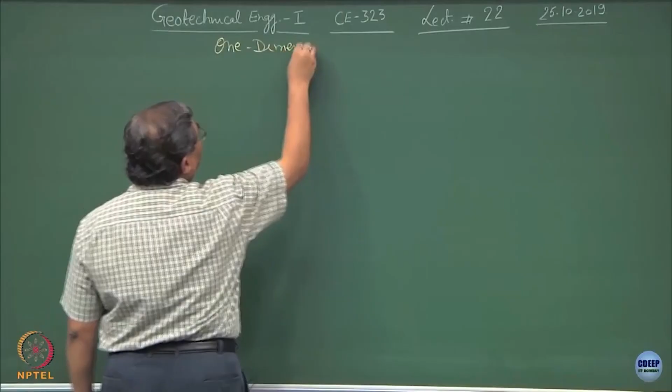Let us try to derive the one dimensional consolidation equation. If I have the soil mass, and if I take an element of the soil mass of depth dz located at a depth of z up to the CG,

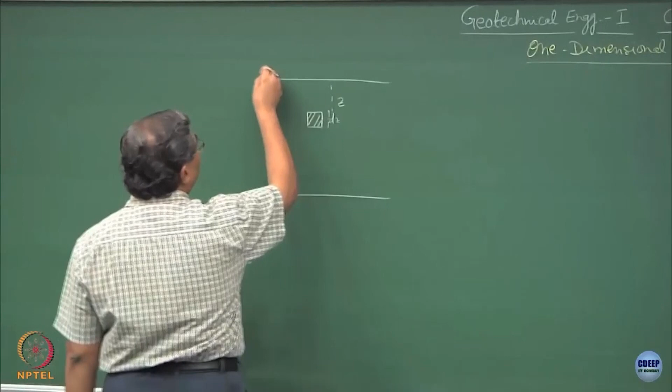as you remember, what we did is we exposed this soil mass to external loading, maintaining two boundaries which are freely draining. So this is boundary number 2 and number 1, and there is an external load applied on the system, which is causing delta sigma to occur at this point at the middle of this element.

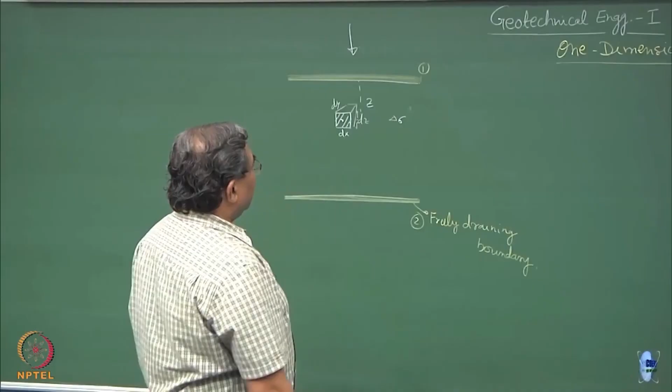So if this is dx and the third dimension if I consider to be dy, because of the loading the pore water pressures are going to develop, and because of the development of pore water pressure and due to the vicinity of the draining boundary, there will be a tendency of the soil mass to dissipate the pore water pressures.

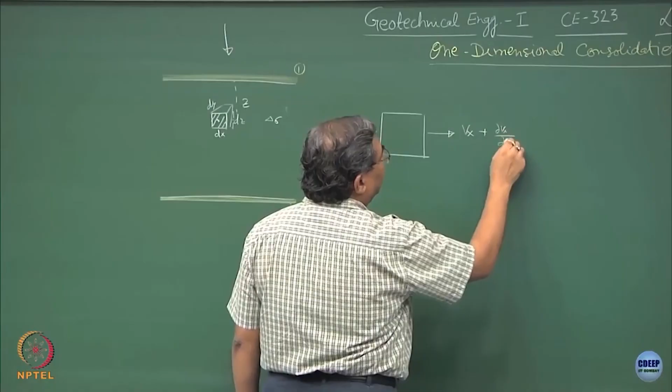So suppose I assume that in this element there is an influx of seepage or discharge, and this is Vx plus del Vx upon del x into dx. This is the continuity of flow entering the system. In this direction I can say this is del Vz upon del z into dz. So I have to reverse the directions of the arrows - this is Vz, and this is the discharge which comes out.

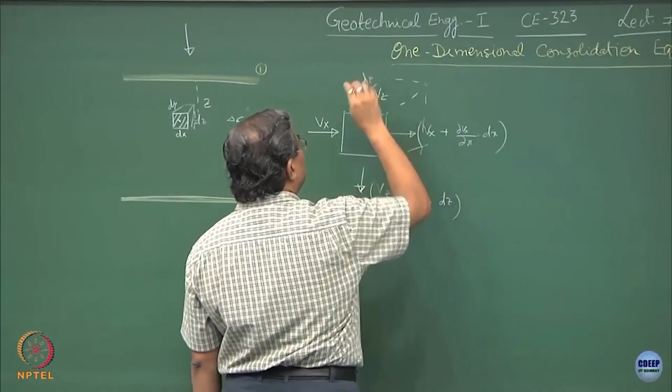I can consider this element as a 3-dimensional element the way I showed earlier, and this axis is dy. I can write dV by dt is the change of volume. Let me put this as capital V - this is the volume of the element of the soil.

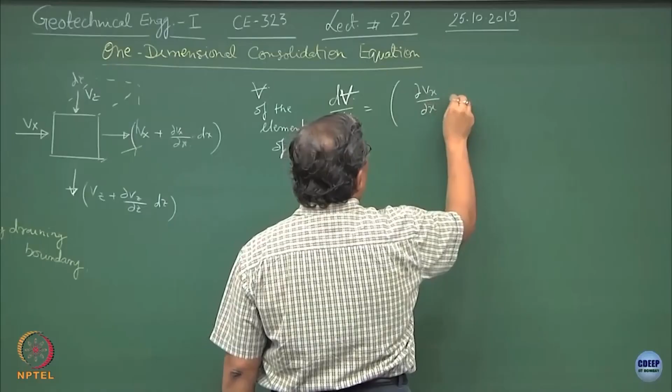I can prove that this dV by dt equals velocity into the area. That means del Vx upon del x into dx multiplied by dy dz, plus del v by del y into dy into dx into dz, plus del v by del z into dz into dx into dy.

I can simplify this as del Vx upon del x plus del Vy over del y plus del Vz over del z, all multiplied by dx into dy into dz.

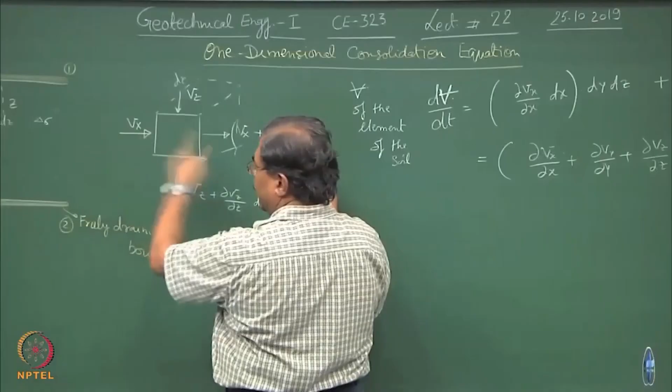I hope you realize that I have already subtracted the discharge coming out of the element from the discharge entering into the element. So this is the mass balance. Otherwise this would be Vx plus this term multiplied by dy dz, minus this term.

Now if I consider that the soil element is incompressible, under that condition what happens? This will be 0. But most of the time soils are compressible as we discussed, so del V by del T is not equal to 0.

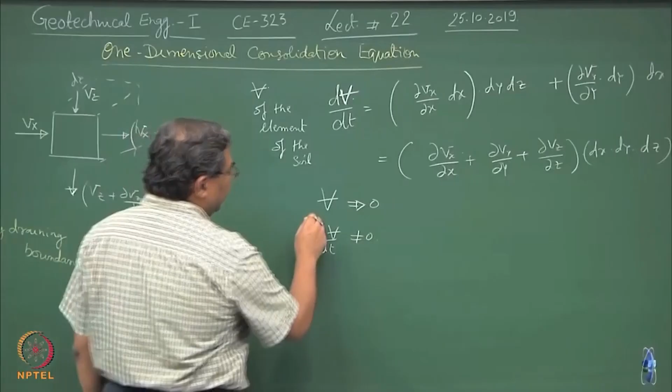Now the question is, if I assume one dimensional consolidation occurring in the system, can I obtain a relationship showing the rate of change of volume with respect to time? This is where we can take help of the relationship we developed: delta H upon H equal to delta E upon 1 plus E naught equal to - this was our basic premise. Is this okay?

Now, analysis of this leads me to a situation where delta H is equal to mv into delta sigma prime into H. You agree? This we derived in the last lecture.

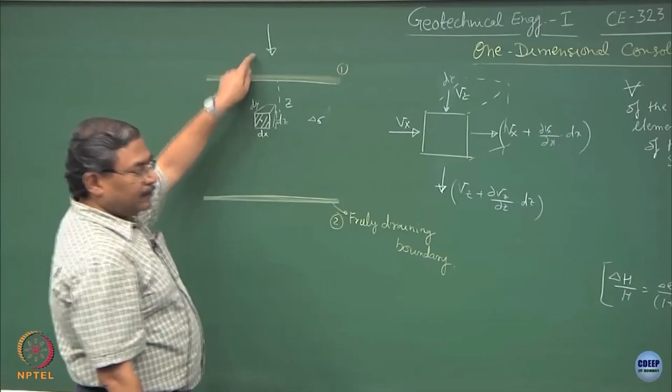What is delta sigma prime? Delta sigma prime is the effective stress developing at the CG of this element which we have considered, because of the external loading. So this delta sigma prime is equal to delta sigma minus delta u, and this delta u is nothing but delta uw.

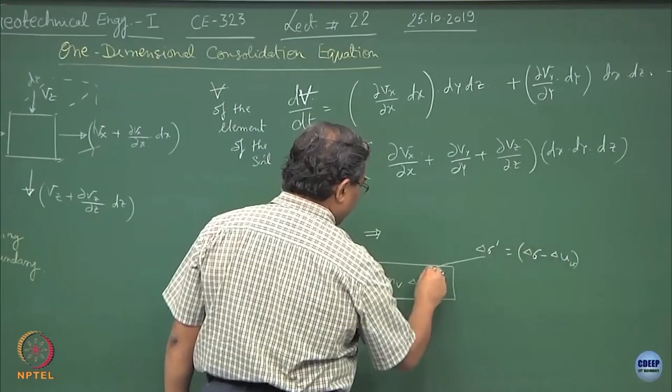Fine. Now if I try to write del v by del t, differentiating this function by substituting it, mv is practically constant we are assuming, multiplied by delta sigma which is constant. What is changing is delta u. I will remove the subscript w now, it is understood that this is water pressure. So this is del of u multiplied by H, which is constant. So what I have done is I have got a relationship between the coefficient of volume compressibility, the pore water pressure developing in the system, and its rate of change multiplied by thickness of the sample.

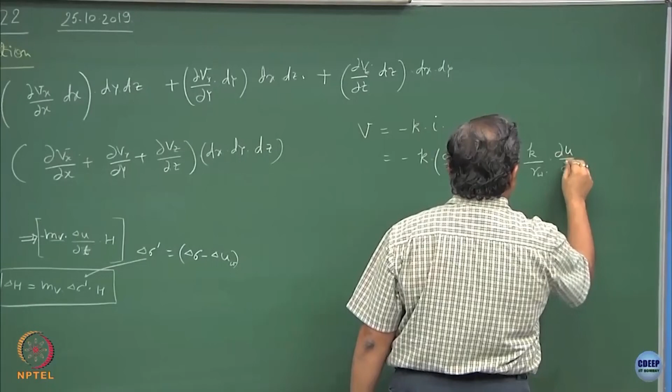Now, is there a way to get rid of the velocity vectors? Velocity is nothing but minus k into i. So I can write this as minus k into del h upon del x, where h is the head, and this can be written as minus k over gamma w into del u by del x. Because h into gamma w is equal to u, the pore pressure. So this is the relationship I am using.

If I substitute it over here, assuming a one dimensional situation, the other terms will disappear. This is the volume term of the element. I can write that minus k upon gamma w into del u by del x, into volume. And we are taking the derivative of this function, so it has to be differentiated with respect to x. This will be equal to minus mv del u by del t into h. So this is your rate of change of volume with respect to time that we have obtained.

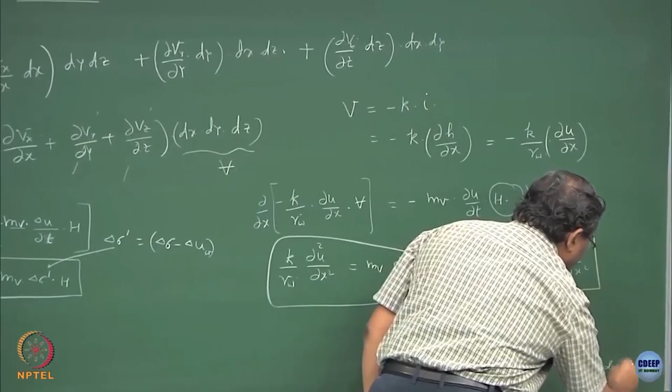This term which is appearing over here is also defined as Cv, where Cv happens to be the coefficient of consolidation. Now this is what is known as the one dimensional consolidation equation, which was proposed by Terzaghi.

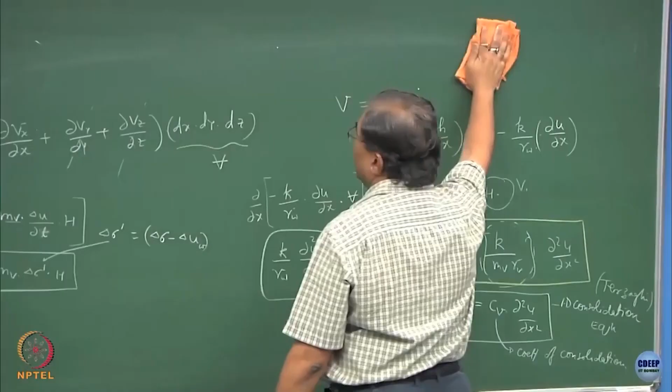Now we need to understand what we should be doing with this equation. Number one, what is the form of this equation? Suppose if I say del square u by del x square multiplied by Cv equal to del u by del t.

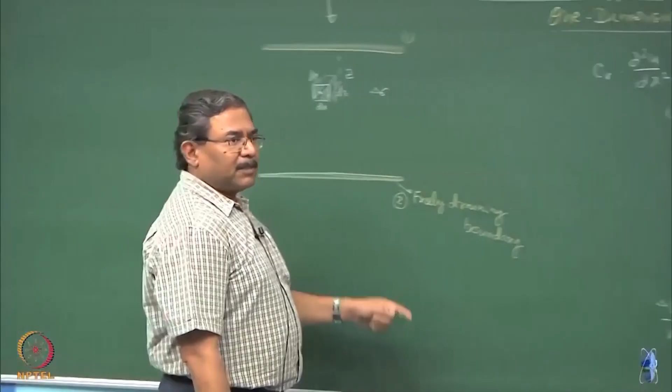Truly speaking, if I solve this expression or this equation, I hope you understand what is Fick's second law, you must have come across it somewhere. So this is u, the pore water pressure. I can substitute it with concentration, or temperature, or whatever you want, and then this is your second order Fick's equation. So truly speaking, u is a function of x and t.

X happens to be incidentally the z. So to make it more apt to our discussion, I will say this is u as a function of z comma t. In simple words, the one dimensional consolidation equation gives the value of pore water pressure at a given time and at a given depth in the soil mass. So that means if I consider a given point at a given time, because of the external loading, whatever pore water pressure is developing in the system is depicted by the one dimensional consolidation equation.

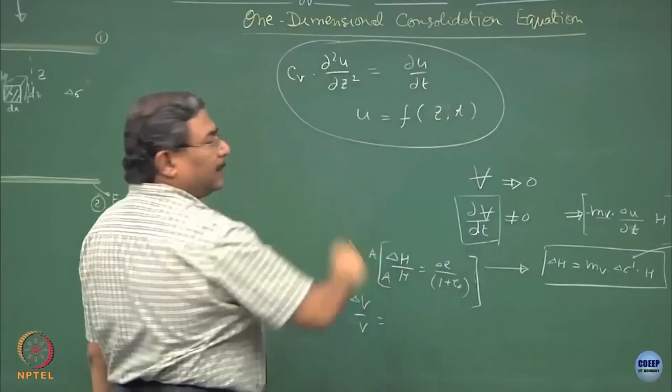So what we have to do is we have to solve this differential equation to get u. So this is the first objective. When we solve u as a function of z and t, I have to apply some boundary conditions.

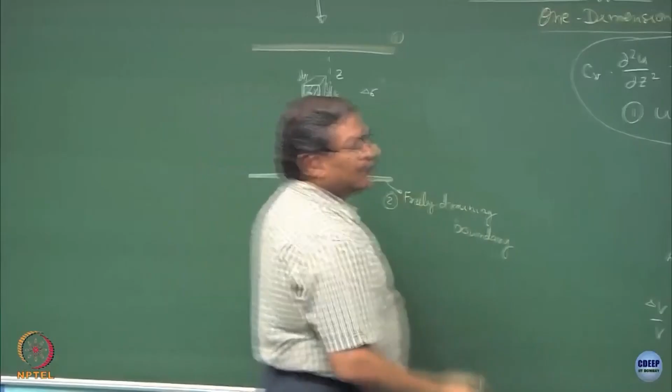What will be the boundary conditions? The moment I apply load, because of the hydraulic conductivity, and this is saturated soil, the assumption is the moment you apply load, delta sigma gets generated, and this delta sigma is at t equal to 0, initial condition. So, delta sigma is generating delta u.

Now, if my initial value of u is 0, delta u is nothing but u. So, this becomes u initial, and if I say minus of this, so basically delta u is nothing but the ui term. Initial pore water pressure is 0, clear? This is the first equation which I am having.

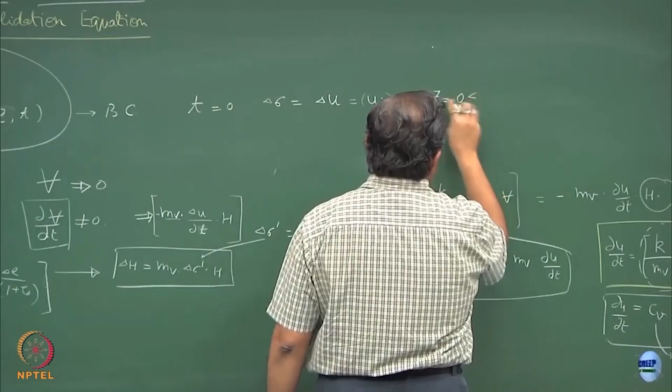Now, this is existing at z equal to 0 at this boundary as well as at this boundary, because both the boundaries are draining. So, this is t equal to 0, delta sigma equal to this, and delta u equal to ui in the entire domain. So, this will be less than equal to 2d.

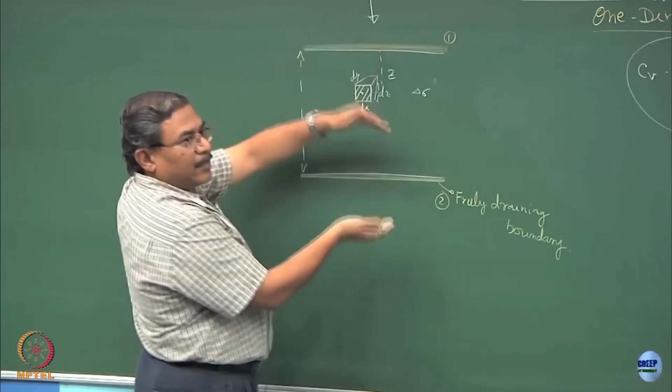The physical significance of this is the moment you compress the whole system by applying external loading, the initial pore water pressure develops, which is equal to the delta sigma value, and at t equal to 0, the entire system shows a constant pore water pressure. Alright, this is the initial condition.

So, that means if I want to plot, let us say this is z, and suppose if I plot pore water pressures. In the initial condition, what is going to happen is the value of pore water pressure developing here as well as here is going to be a constant. I hope you agree with this. So, this is what is equal to ui. The moment you applied the pressure, the pore water pressure is equal to ui at t equal to 0.

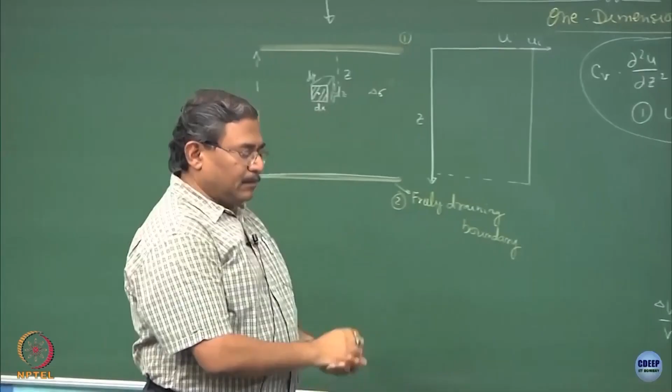Now, what is going to happen? Something intermediate is going to happen at t equal to t, let us say, very difficult to estimate. Or if I want to estimate what is the value of pore water pressure at this time, what I will have to do is I will have to solve this expression. So, this is what f(z,t) would be.

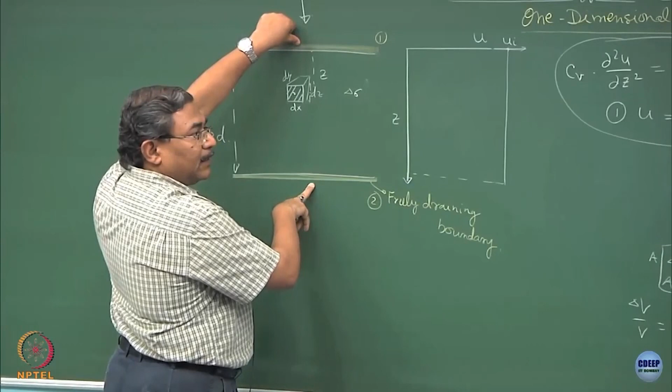Intermediate state. The third state is when I say t is tending to infinity. So, the moment you say t tending to infinity, what is going to happen? Because these two are drainage boundaries, the pore water pressures at this point in the soil mass and at this point in the soil mass is definitely going to be 0, and the pore water pressure is going to be completely 0, because t is infinity. That means the other bound of the plotting would be u equal to 0, which is t tending to infinity.

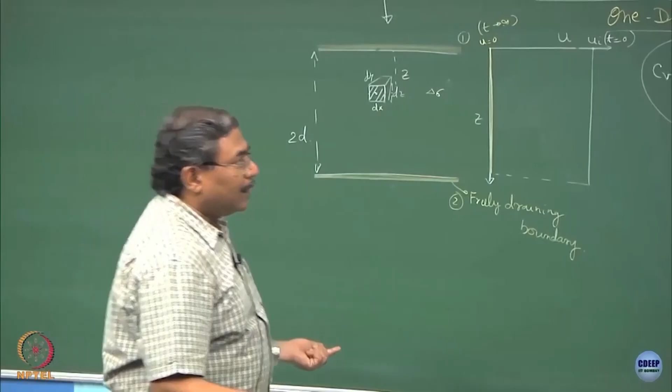And this is the case when you have t equal to 0, initial case. Is this part clear? In between, what is going to happen? Let us try to discuss. What is the form of this equation? What type of equation is this?

It is a parabolic function, alright. So, that means in between whatever is going to happen is a parabolic distribution of u as a function of z and t. So, suppose if I consider the line of symmetry of the sample, this line of symmetry also defines the symmetry of the drainage boundaries. So, whatever I am doing right now is valid only for the drainage boundaries 1 and 2 put together. If I change the boundary conditions of drainage, this solution is going to change.

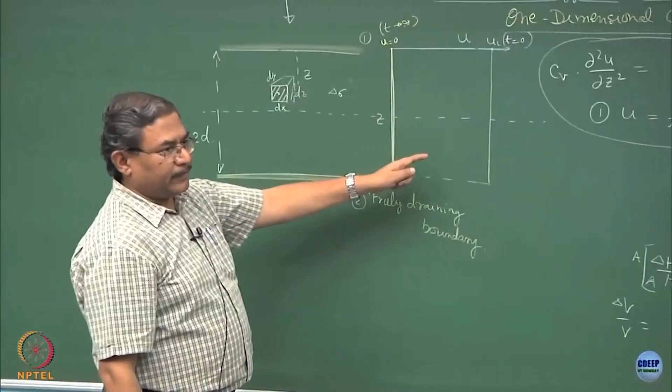Now, it so happens that the moment t increases from 0 to some finite value, this is how it is going to look like. Is this okay? Now, this line is known as an isochrone. What we have done is, we have just represented u as a function of depth for a given time.

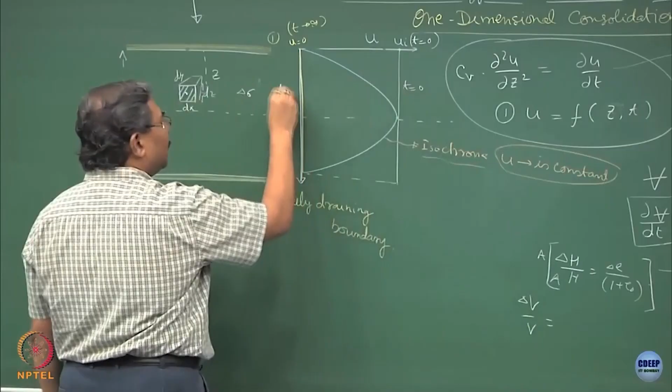So, this boundary, please remember, corresponds to t equal to 0, and this boundary corresponds to t tending to infinity. Alright. So, these are isochrones. As time progresses, what will happen? The isochrones will keep on shifting towards the left hand side. So, in this direction the time is increasing.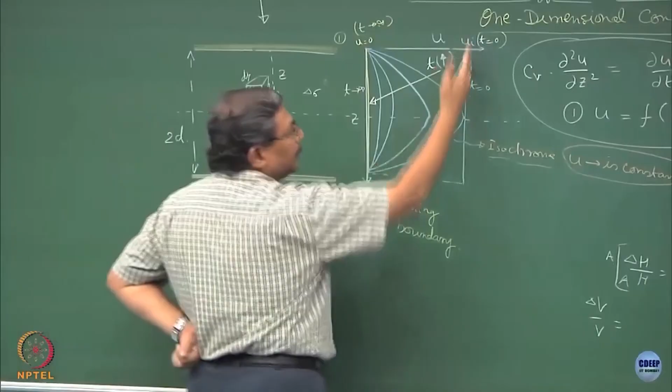And a stage comes when the pore water pressure becomes zero at t equal to infinity. This is the line which you are meeting, this is the initial value. So, what is the interpretation of these isochrones?

If I consider a point over here on this graph or on this curve, can you tell me what this point is going to correspond to? This point is nothing but this equation. Where is the z? This is the z, and where is the time? This isochrone corresponds to a certain time. So, at this point the pore water pressure is this value.

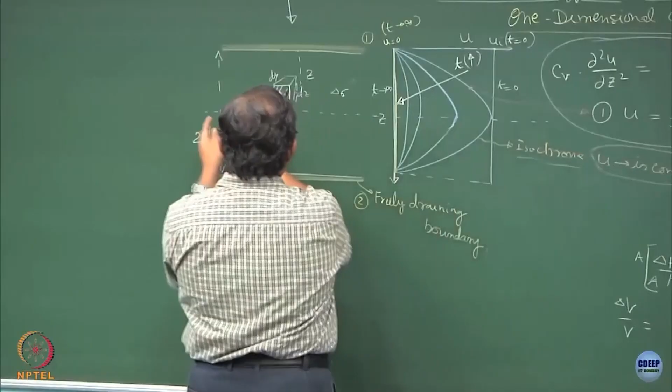There is a symmetry of the isochrones along the axis of the sample, provided the boundary conditions are same, both sides draining. Now, if I draw a tangent over here, what is this going to give me? And if I draw a tangent over here, what am I going to get?

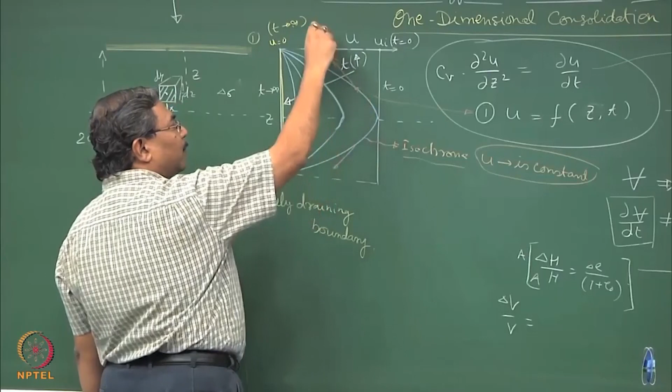Del u by del z at a given t. What is del u by del z? Velocity vector. So, this is the velocity of the water which is present in the pores at this point, and what is the direction? It is moving up, this is moving down, because there is a free draining condition here, and a free draining condition over here.

At this point, what is happening? If I draw a tangent, this is a velocity vector and this is a velocity vector. So, this is the interpretation of the isochrones.

There is one more thing we would like to discuss about the isochrones and how they can be utilized in day to day practice of geotechnical engineering. I hope you are realizing that isochrones are nothing but a graphical form of solution of this equation, and ultimately as t tends to infinity starting from t equals 0, isochrones are also going to tell you how the consolidation process is occurring.

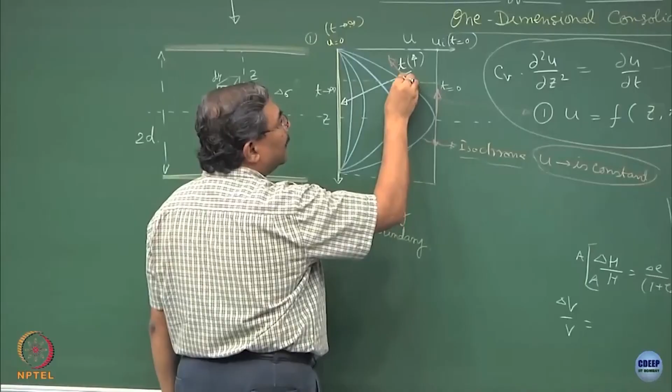That means, if I draw a lateral horizontal line, suppose here, now this is the value of, out of so much of the pore pressure, look at this, x axis is ui, alright. Suppose this is the value of u. Now what is remaining is ui minus u.

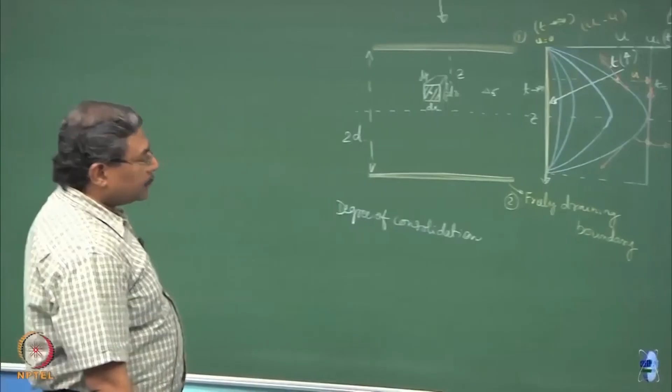That means, if I want to define a term degree of consolidation, it is defined, normally capital U, and this is equal to the total amount of pore pressure which is available to get dissipated to the one which is remaining. So, I will be defining this as ui minus u over ui. This can also be written as 1 minus u upon ui.

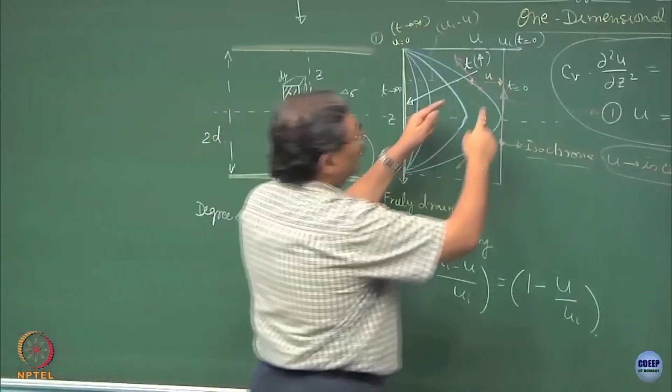Imagine that I wanted to find out what settlement a soil mass undergoes because of external loading, given known properties like K, MV, initial void ratios, gamma D, moisture contents, and saturation equal to 1 since we have saturated the sample. All these properties are known. What I have to do is get the values of pore pressure as a function of Z and T.

Is there any other way to do this rather than going for all this mathematical analysis, experimentally? Yes, there is a way. Ultimately, what I am measuring is pore pressures, which we have measured until now in several cases. So, what I have to do is insert several piezometric tubes all along, and whatever amount of pore pressure comes over here, I can use this for drawing these contours.

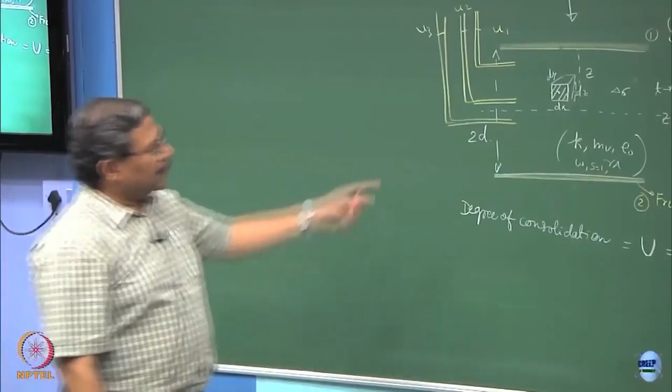It is very difficult to conduct this type of experiment because the size of the piezometric tubes is quite big, and the size of the sample, if you remember, is hardly 25 mm in the laboratory. But suppose you want to see what is happening in the field, you can insert these types of piezometers or capillary tubes, and obtain the pore pressure developing because of external loading. So, you are free to do whatever you want to do.

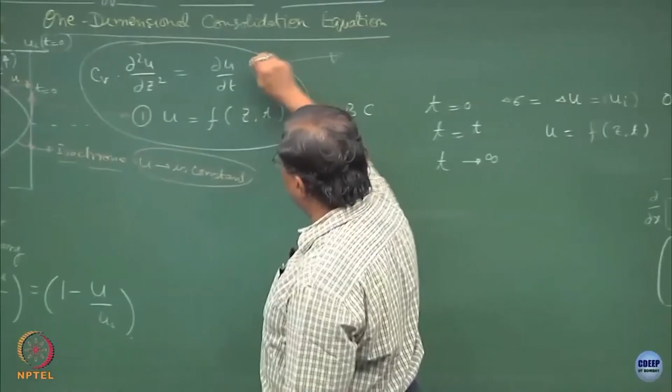The most interesting thing we have got from this simple analysis is, first of all, the equation and its nature. The solution of this equation is going to give me the pore pressure, and using this pore pressure I can find out the degree of consolidation. Now, degree of consolidation is going to tell me how much settlement of the system has occurred.

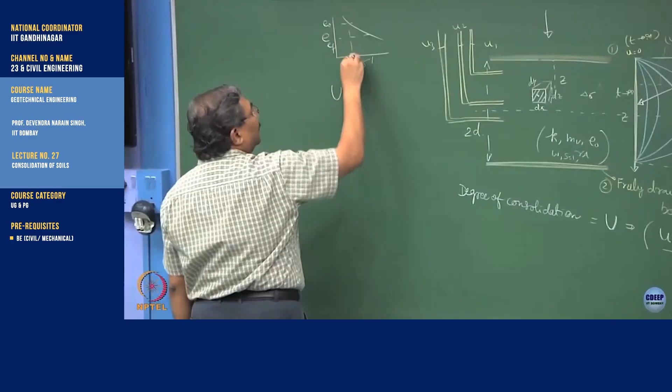That means degree of consolidation can also be defined as, suppose if I extend this analysis to the E-sigma prime curve, starting from E naught I attain E f, and corresponding to E naught the sigma is sigma naught prime and this is sigma f prime.

So this is a situation where I can say E_f minus E_naught, this will be in the denominator, and something intermediate which I can define as E_T will be coming over here.

So this is another equation which I can use for defining the degree of consolidation. Is this okay? That means the void ratio at a given time minus initial void ratio, upon E_F minus E_naught.

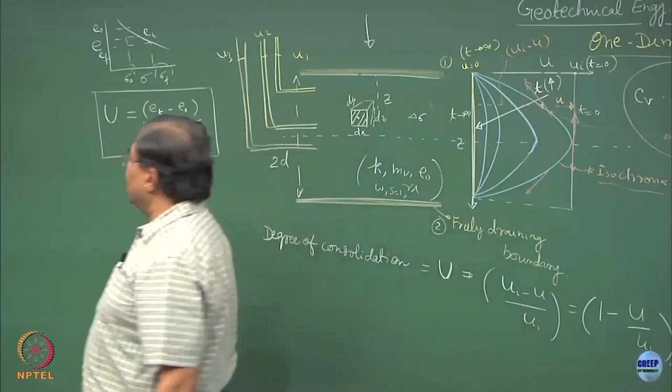I hope you understand E_F is going to be lesser than E_naught, E_T is going to be lesser than E_naught. So negative negative will cancel out and this will become E_naught minus E_T upon E_naught minus E_F. So there are several ways of doing this.

Now let us complicate this function a bit, because in real life these type of boundary conditions are rare. What we have discussed until now is the laboratory setup, where if you remember we had taken a consolidometer ring, we call it an oedometer ring, we kept the specimen there, we put two porous stones there, saturated the entire thing, applied the external load. So this equation is specifically simulating what you did in the laboratory.

If the sample in the water bath can be maintained at elevated temperature, if I do the whole exercise by increasing the temperature of the sample, now we have a coupled effect. This is what people are doing in the Western world. This is THMC of everything.

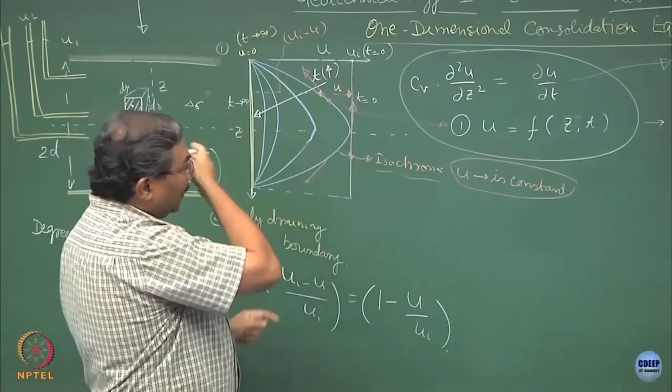That means this whole test has been done under STP, standard temperature pressure conditions. I can raise the temperature of the sample to a certain value and see what is going to happen to the consolidation, how the pore pressures are going to change. So those of you who might get a chance to work in thermoactive structures would still be analyzing the whole thing, only now it would become a function of temperature also.

And that becomes a coupled phenomena which is complicated. So at undergraduate level you are not supposed to learn all these things. A bit more analysis of this fact which we were discussing.

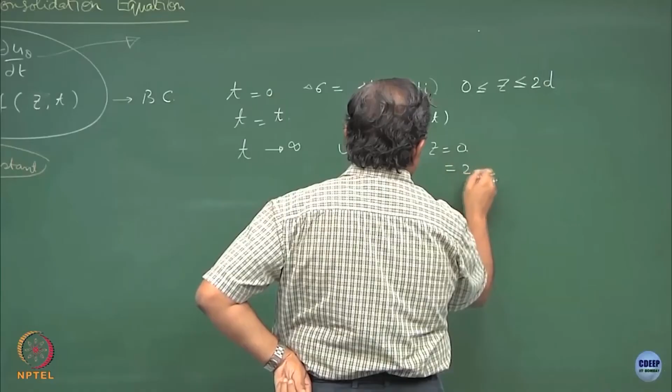So at t tending to infinity, what is going to happen? The value of u tends to 0, and this is going to happen only for z equal to 0 and z equal to 2d, because in between we are not sure about what is happening. So we have to do it either analytically or experimentally.

Now suppose if I say here we have a well defined distribution of the pore pressures. Now if I say that u is a function of z, I do not know what type of variation of the pore pressures is.

So I can also write this as 1 minus, if I say u(z), and from 0 to 2d it is varying in a certain fashion, I can average this out and integrate it from 0 to 2d into dz. The u_i remains the same. If I integrate u_i also in the same form, what is going to happen? This 1 upon 2d will get removed and this function will also get changed to 2d into u_i into dz.

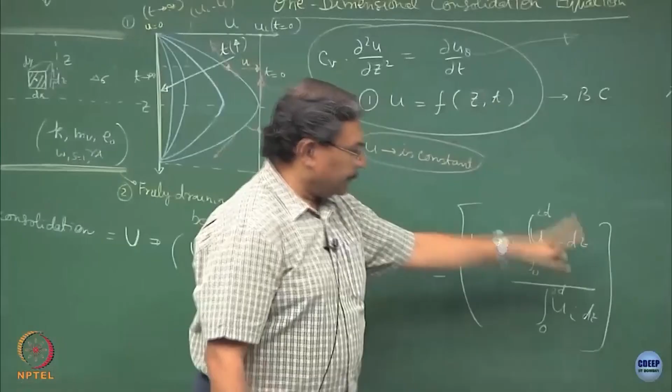That means, if I say that the initial pore pressure is also a function of z, this type of manipulation can be done. The triviality comes...

Suppose if I give you a situation where the clay sample is draining only from one side, this is the impervious strata, alright, and this side is draining. In nature, how is it going to happen and when is it going to happen?

Suppose there is a clay layer, a clay seam which is sandwiched in sands. So this is sand and this is sand, both sides draining condition, what we have discussed over here. The porous stone simulates both side draining.

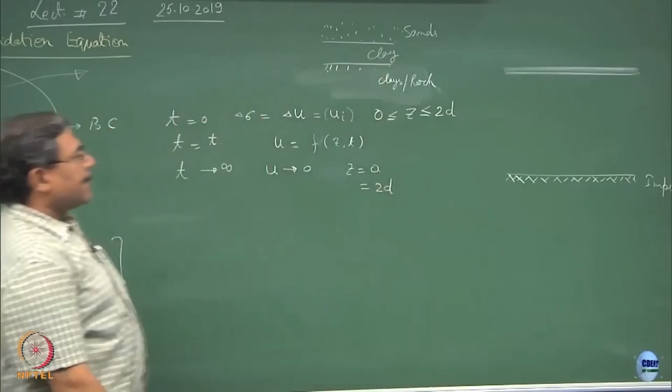I change the context of the problem. The clay layer is underlain by, let us say, another clayey layer or a rock, and hence this is going to be impervious. Now if this is the situation, this becomes one side draining. So when I intentionally used this 2D term, this 2D is defined as the drainage path.

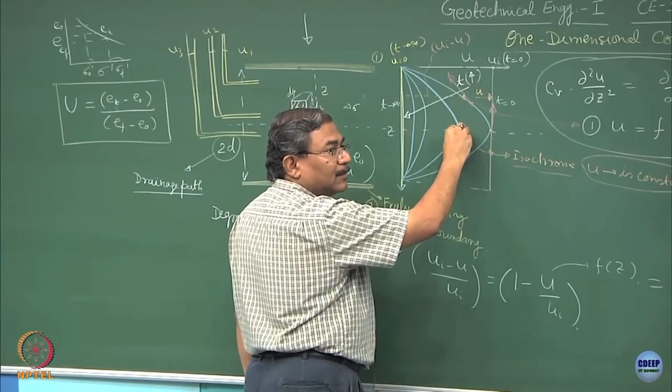So, the drainage path is going to be half of the 2D value. Why? Because there is a line of symmetry, and we have already proved that all these points are going to drain. This point remains confused whether it should get drained here or whether it should get drained over there.

In other words, how many of you have baked a cake at home? If you really want to learn the consolidation process, go and make a cake, and you will realize that despite good heating in the microwave oven, the central portion of the cake remains uncooked. Why?

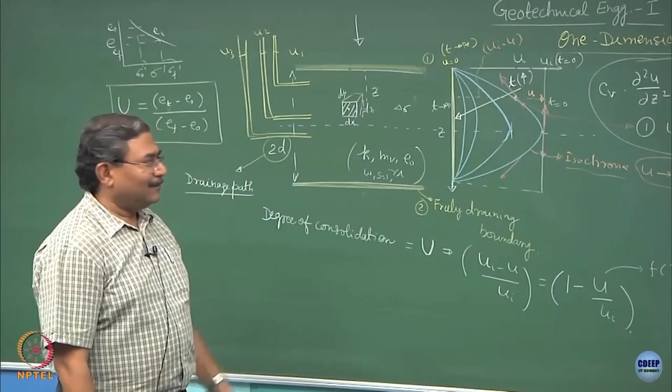This is the answer. Look at the water molecule. It does not know whether it should go on this side or come on this side. So that means the central layers always remain wet. There is no draining taking place, so it is very difficult to consolidate the sample fully.

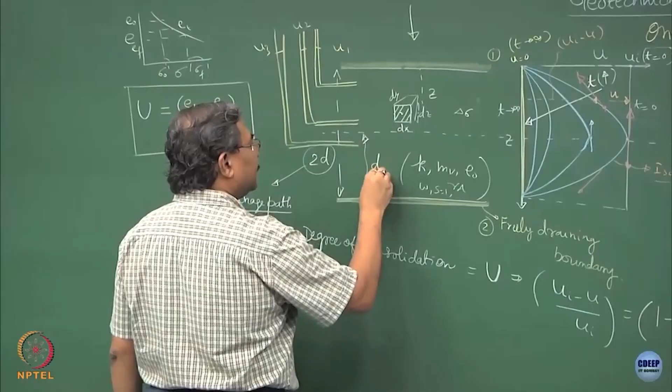So, the drainage path is defined as half of the 2D, let us say D. This is 2 times the drainage path, and D becomes the drainage path through which the drainage is taking place. In this case, the drainage path is going to be equal to H, because this is one side draining only.

Now, suppose I ask you to plot the variation of U with respect to time, what is going to happen? Start from the basics. At t equal to 0, the entire load comes on the system, the pore water pressure develops. This is the value of Ui, which is equal to delta sigma, the external load. As time passes by, what is going to happen?

The top layer will quickly dissipate the pore water pressure, but this being an impervious surface, this is not going to dissipate anything, and hence you have created a sort of profile of pore water pressure like this. Is this okay? I will say that this is the profile, u as a function of z and t.

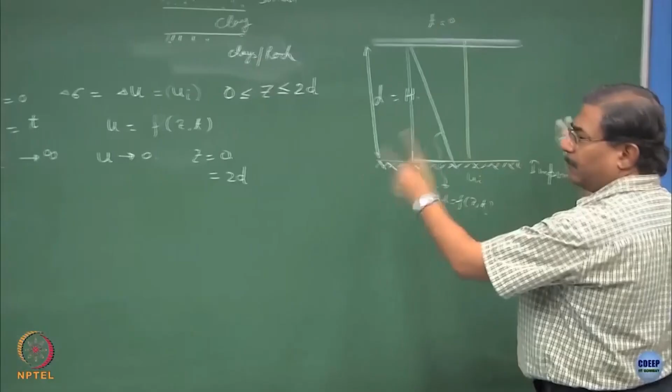This case is known as a partial drainage case or half drainage case, and as I said, this is possible when the clays are sitting over an impervious system, or a clay system which is much more impervious than the clay in which you are trying to find out the settlements.

Now, one more thing which is still bothering us is CV is unknown. You agree? This is a bigger culprit. So, we do not know how to obtain CV because there is some coefficient.

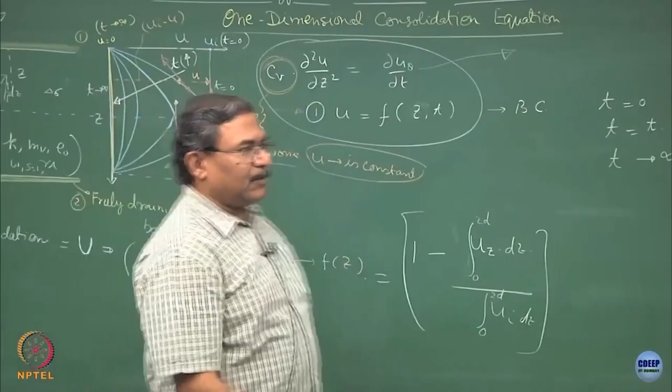Now, you can always say that if I conduct a one dimensional consolidation test and use this expression I had written for CV, so CV equal to K over mv into gamma w. If I know the hydraulic conductivity of the soil, if I know its mv value which I can obtain by conducting the one dimensional consolidation test, gamma w is known, CV can be obtained.

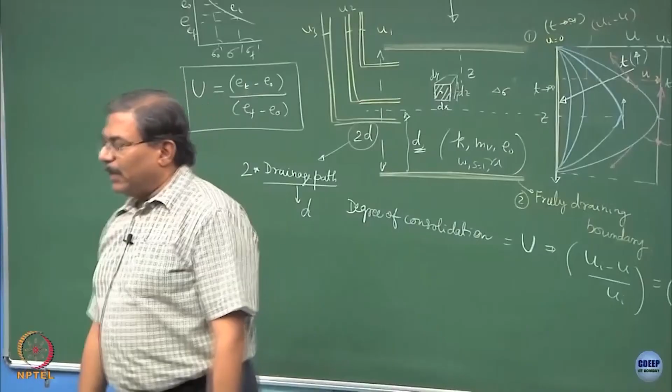Simple method, but normally this is not done. We never obtain CV like this. What we do is we obtain CV, we know MV, we know gamma W, we compute K. So, K is equal to CV into MV into gamma W. Hydraulic conductivity can be obtained by knowing MV value, CV value and gamma W. So, we deferred the problem, it is not solved yet, we still do not know CV. Clear.

One interesting thing you must have noticed, if I ask you what is the dimension of CV, so this is del square u by del z square equals del u by del t, u is truly speaking a pore water pressure parameter. So, the units of CV will be L square by T, and hence this is known as a diffusion coefficient.

Those of you who might get a chance to do higher research in THMC, THMCB and other series of contemporary geomechanics, you can replace this term by different types of coefficients. If I replace U by C, concentration gradient in the direction of Z, concentration gradient with respect to time, change of concentration, diffusion coefficient D, clear.

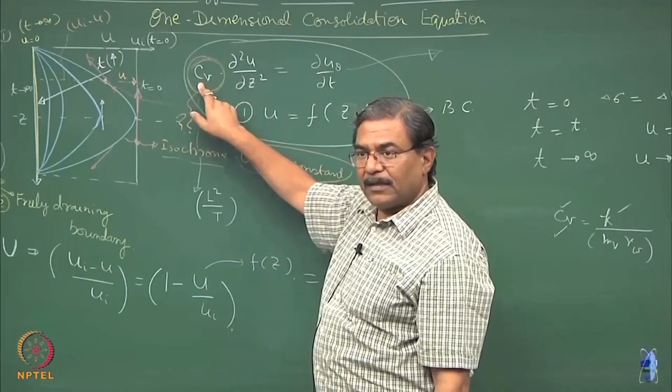If I am interested in how heat migrates in geomaterials, del square theta, theta is the temperature, rate of change of temperature with respect to distance, rate of change of temperature with respect to time, and this coefficient is going to be thermal diffusivity, clear, that becomes alpha. So, this is how you can interpret the equation.

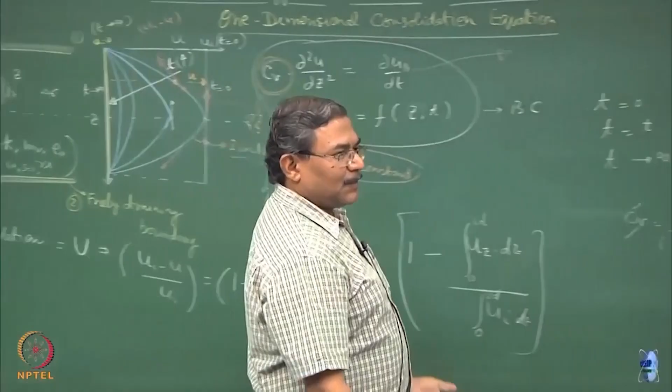Now, let us come back to the consolidation theory and relook at what we need to do further. Is this part okay? If I solve this equation in analytical form, the solution of the one dimensional equation can be written as the pore water pressure equal to

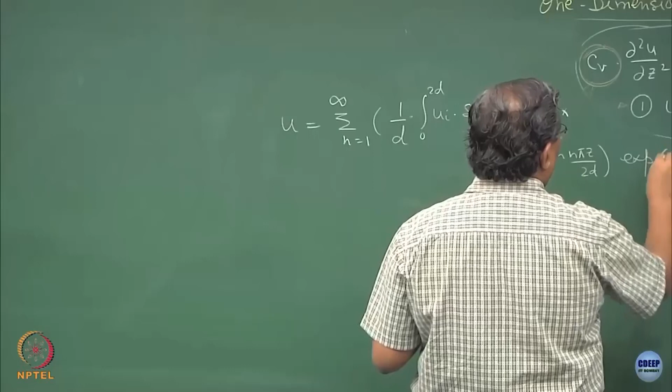summation n equal to 1 to infinity, 1 upon d, half of the drainage path, integral 0 to 2d of ui sin(n pi z upon 2d) dz, multiplied by sin(n pi z upon 2d), exponential minus n square pi square Cv into T upon 4d square. So, this is the solution known as a Fourier series, which you obtain when you solve the one dimensional consolidation equation.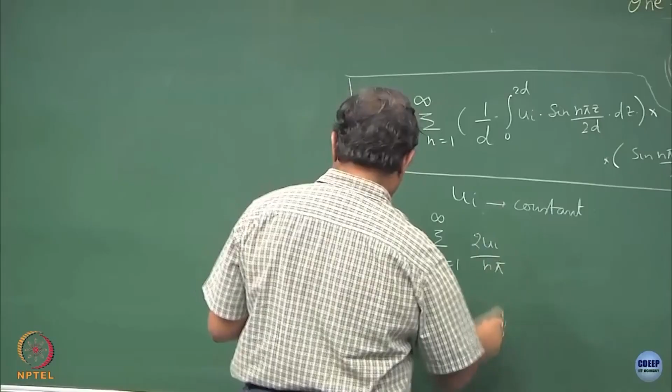If I simplify it further, assuming that ui is constant throughout, this can be written as n equal to 1 to infinity, 2 times ui upon n pi, times 1 minus cos(n pi), times sin(n pi z upon 2d), times the exponential term.

If I assume that Tv is equal to Cv into T upon d square, this is what is known as the time factor. Fine, it is a dimensionless factor.

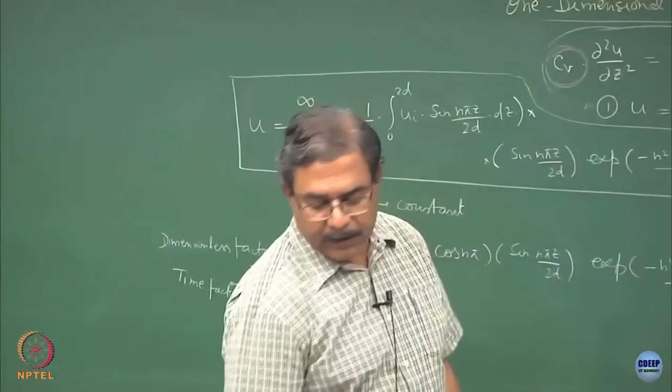Now, what is the interpretation of this parameter TV? Normally, we have used the TV term here, and this defines the drainage which is taking place in the vertical plane because of the vertical loading. So, one of the characteristics of TV is that this is material dependent.

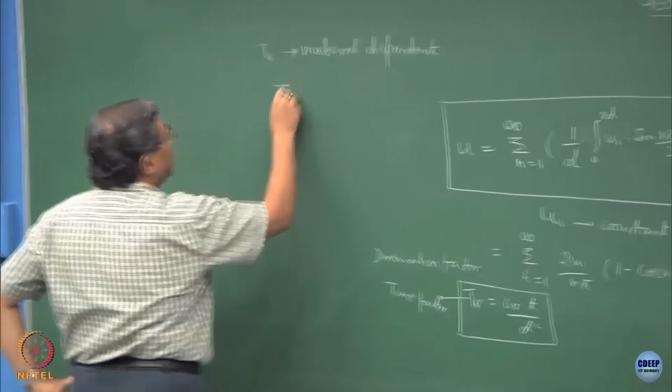That means, if I conducted a laboratory test, and if I take out the sample of the soil from the field and the same sample has been tested in the laboratory, I can say that this will be equal to TV in the field.

There are several possibilities. The possibilities are this TV is CV into T upon d square in the lab, and this will be equal to CV into T upon D square in the field. As I said, as long as the material is constant, same material, CV cancels out. So, you have a relationship between T and D in the laboratory and the field.

So, basically you are doing a sort of a modeling of models which you normally do. Only thing you have to keep in account is that this should be the drainage path in the field condition. I might be doing a laboratory test by maintaining the double drainage condition, where both sides the drainage is allowed.

However, there could be a situation in the field where the D will become, let us say, the total thickness of the deposit, as we discussed some time back. This is equal to H, the total thickness of the deposit, and this happens to be a draining boundary, the sand layer. So, that is the only difference. Clear? So, another interpretation could be regarding the drainage paths.

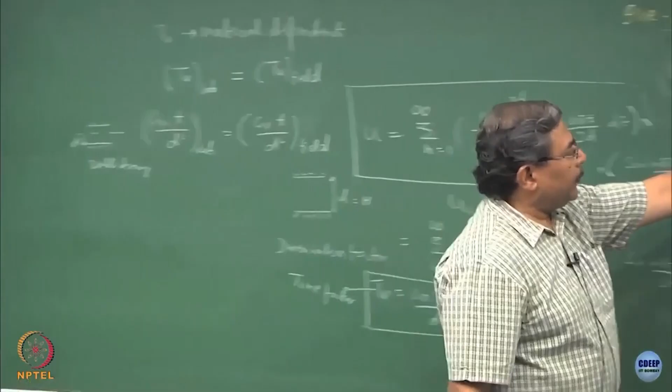The second interpretation could be about the time, physical time, because this T is the physical time. You remember the time at which a pore pressure is being determined at a given depth. Now, what this might tell you is, to achieve a certain value of TV which is linked with U, and U we have defined as the degree of consolidation.

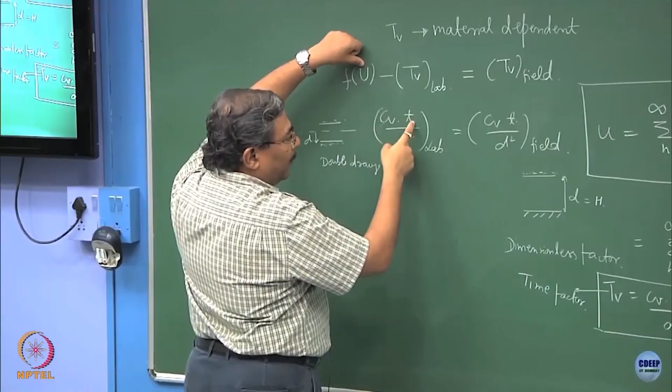In other words, what we are going to get is, I am going to get the time required under the laboratory condition and in the field condition, which is going to tell me how much amount of degree of consolidation has occurred. In other words, I can simulate by doing a simple laboratory one dimensional consolidation test the real life situation. So, this is the equivalence which we use.

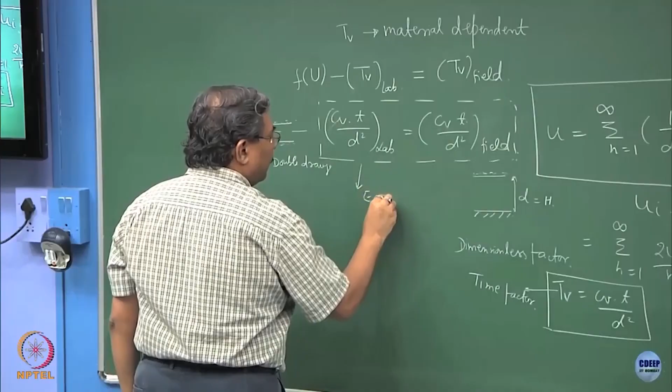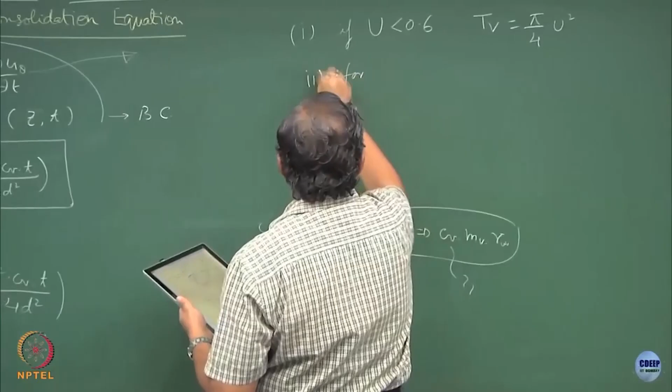Now, if you solve this equation further, you will be getting some more interesting results. The first one is, if the degree of consolidation is less than 60%, we get TV equal to pi by 4 into U square, and for U greater than 0.6, the TV value is defined as 0.933 log (1 minus U) minus 0.085.

In literature, or in the books, you will be getting relationships between U from 0 to 1, or 100%. I can put it in percentage also, it is up to you. And suppose if I put the U value on the y axis, which is equal to CV T upon D square on the x axis, this is how the graph looks like.

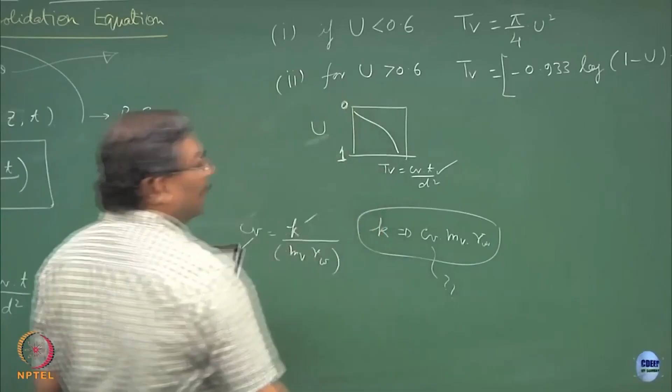The first thing this graph tells you is, as physical time increases, the TV value increases. TV value increases means degree of consolidation increases, clear, and this is what is getting depicted over here. So, please be careful as far as observing the y axis is concerned. This is from 0 to 1 and this is the TV value. I may have different boundary conditions which you can substitute.

Now, the interesting thing here is the relationship between U and T. This again is a parabolic equation, provided U is less than 60%. The moment this becomes more than 60%, there is a linear nature coming in the picture, constant, and 1 minus U of log. This is going to be an exponential term or logarithmic curve.

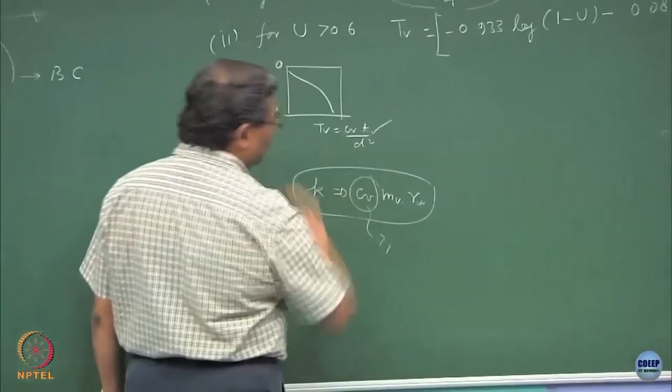So, this culprit is still unknown, is it not? So, we have to do something to get the CV value, because what we have done is very conveniently we have used this term over here also to define the non-dimensional time factor, which is an integral part of the one dimensional consolidation equation.